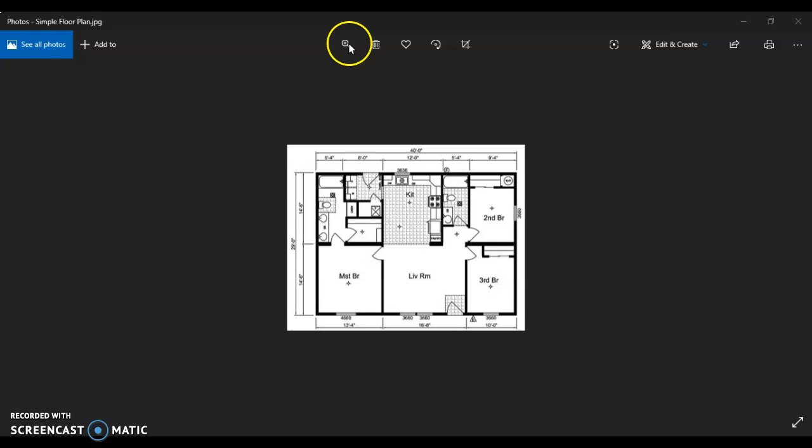We've got most of our walls taken care of, but we need to finish up a couple of these walls. This wall here, we currently just have drawn like this. If I look at SketchUp, right here's the bathroom. We need to cut this little wall out, and we've got to finish this wall.

And this is how we edit walls once we're doing this. And then in here we have a closet. And we have a closet.

Closets are 24 inches deep, inside to inside. That's what a clothes closet is. That's what it takes to hang something. So 24 inches deep, and then we're going to figure this out. This is going to be a 3/0 door, so we have to be at least 3 foot 2 inches away from here.

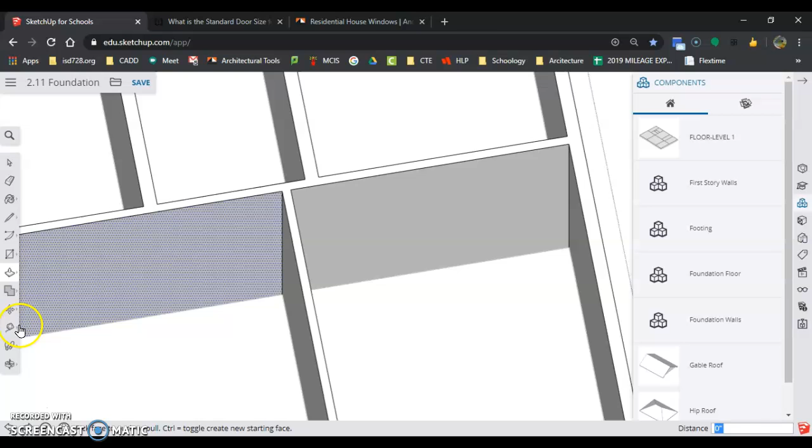So we're going to come here. We're going to take care of this closet first. Guideline, bring it down, 2 foot. Guideline, bring it forward. And then 4 inches, or 3.5 inches, because if I take a look, remember I'm 3.5.

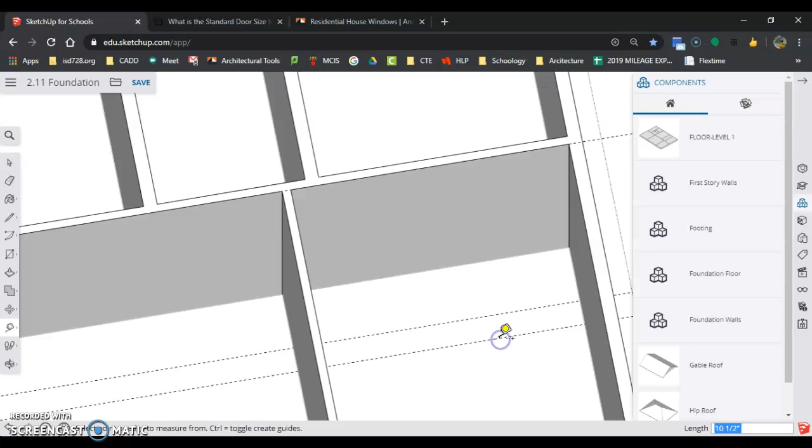Then come in here. I want to be at least 3 foot 2 inches away from here because that door's got to swing open. And then I have to be another 3.5 inches there. So that's this closet wall.

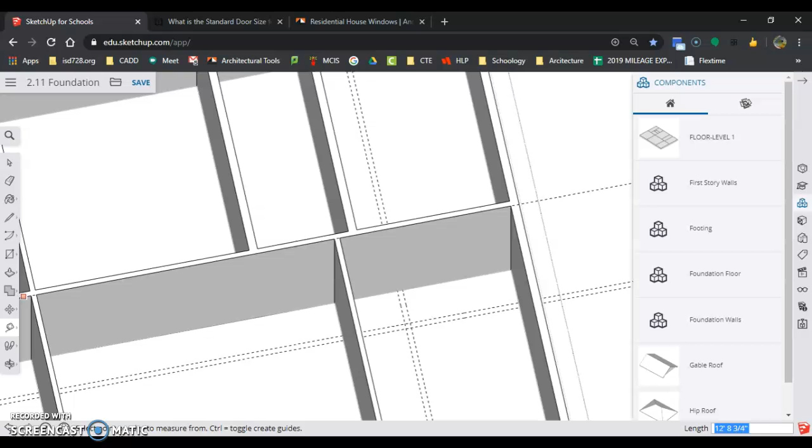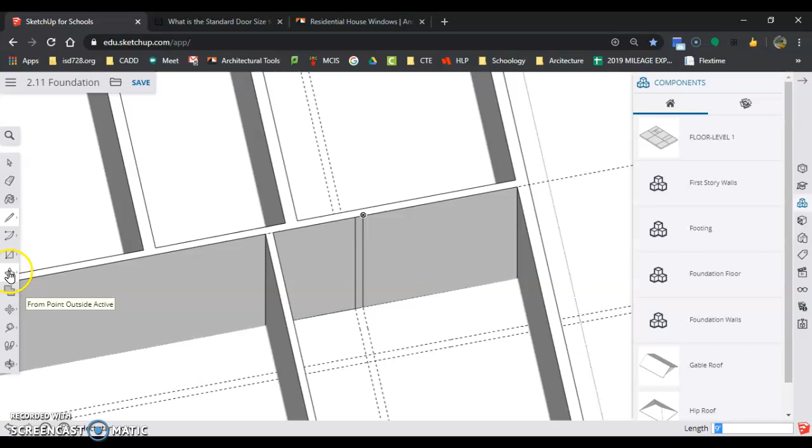And again, I'm inside this model as I'm drawing all of that. Now I can draw a line straight up. Draw this line straight up. And we'll do a push-pull and bring this wall to that guideline.

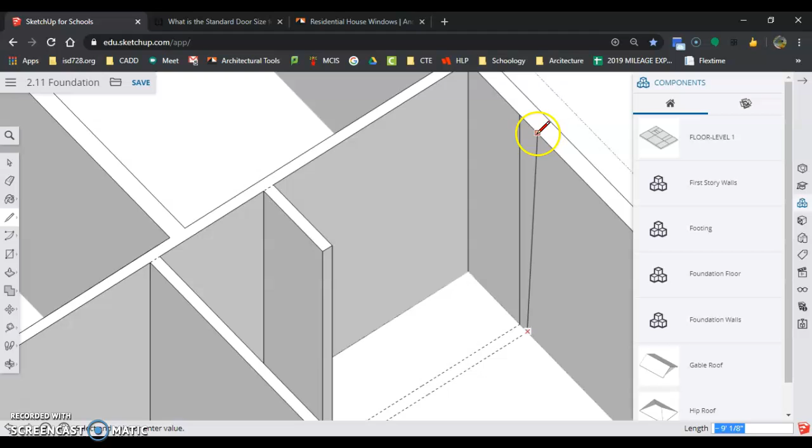Again, draw a line straight up. Draw a line straight up. And do a push-pull to that guideline. I can erase that out. Now I've got that closet in.

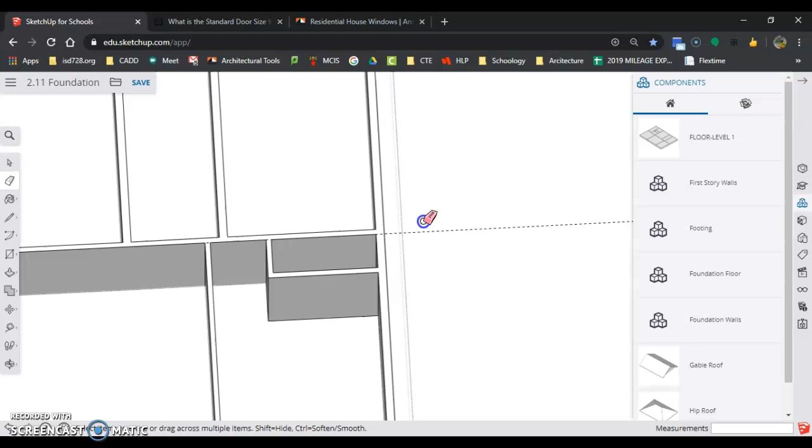Next closet's a little bit easier. So I've got this closet done, and I'm going to this closet over here.

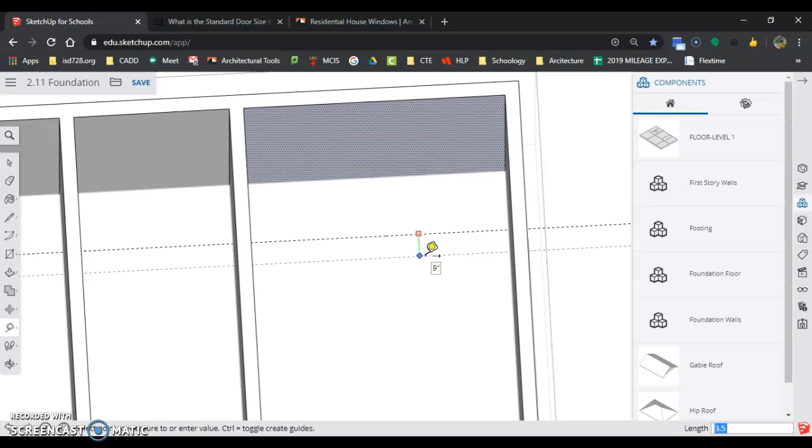Tape measure. Bottom, coming down on the floor 2 feet, coming 3.5 inches. Draw my lines straight up.

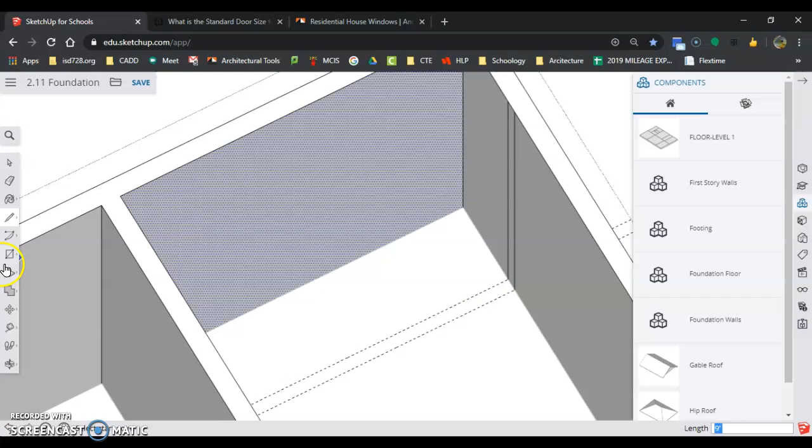Draw this line. Straight up, push-pull it, right across. And I can erase out that edge. Come here, make sure my edge is erased out, and erase that. Now I've got that closet completed and this closet completed.

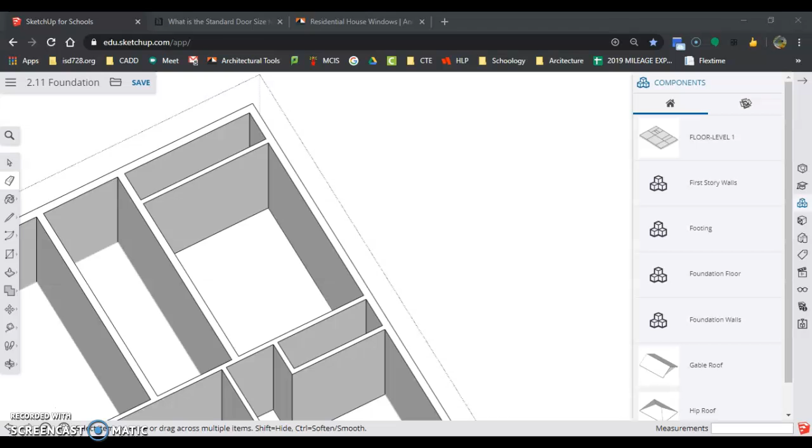Last thing I have to do is work with this piece here. So I'm going to try to put a 3/0 door in here, and we can maybe move this afterwards if we need to. So we need to have 3 inches on each side. So this door going into this bedroom is going to be a 3/0. And actually, let's clean up this wall here first.

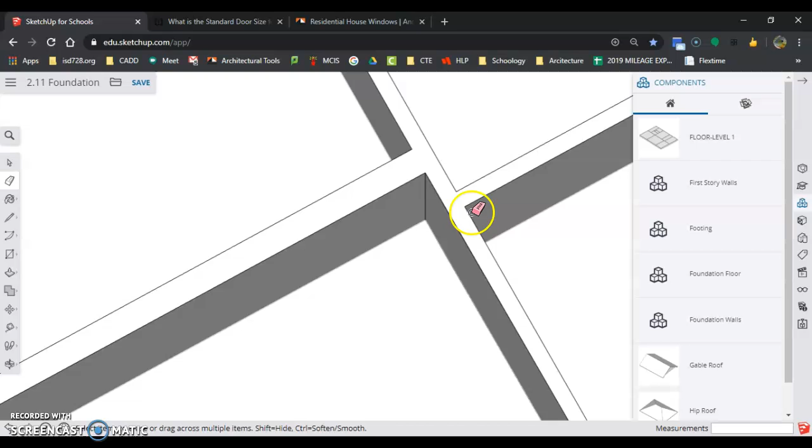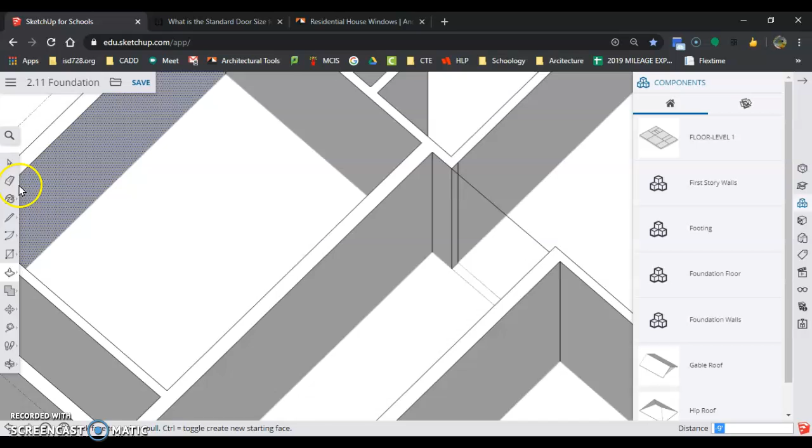So I'm going to knock this wall out by just drawing a line across. Drawing a line across. And now I can push-pull. Drop that down. Erase that extra line. Erase my top line. Make sure I didn't delete a surface. And I have that opening walking through here.

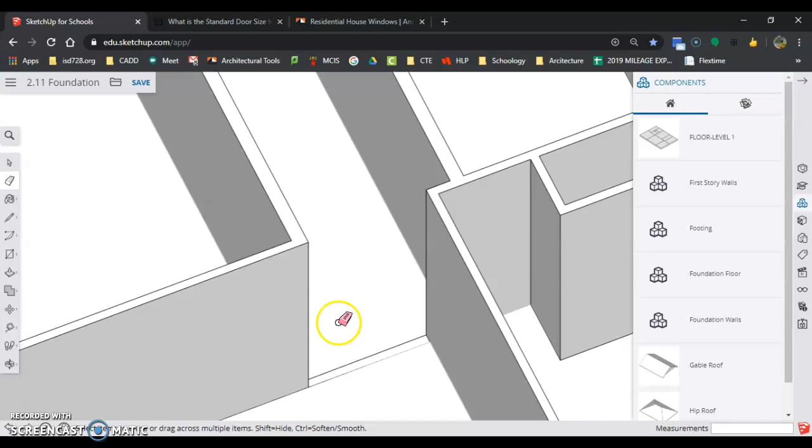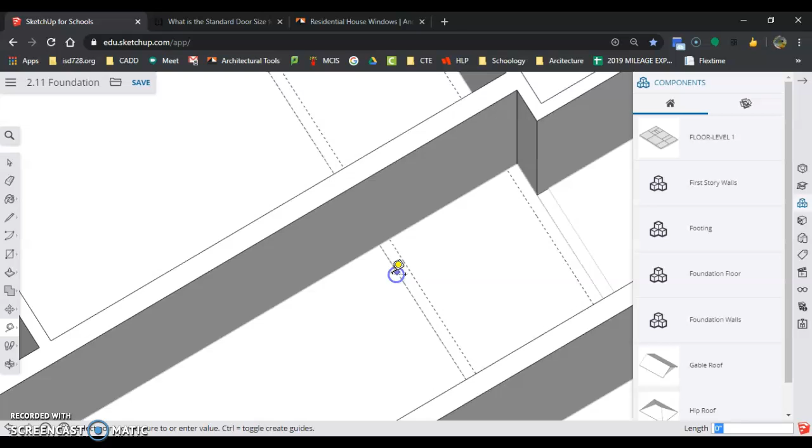Now I've got to figure out this door. So I'm going to put a 3/0 door in here, and this is going to come later in it, but I'm going to put it 3 inches, then we're going to go 3 feet, and we're going to go 3 inches. And that's my door opening. And then I'm going to go 3.5 inches, or from this wall it'd be 3 inches and 3 inches and 3 feet, so 3 feet 6 inches, and then 3.5 inches there.

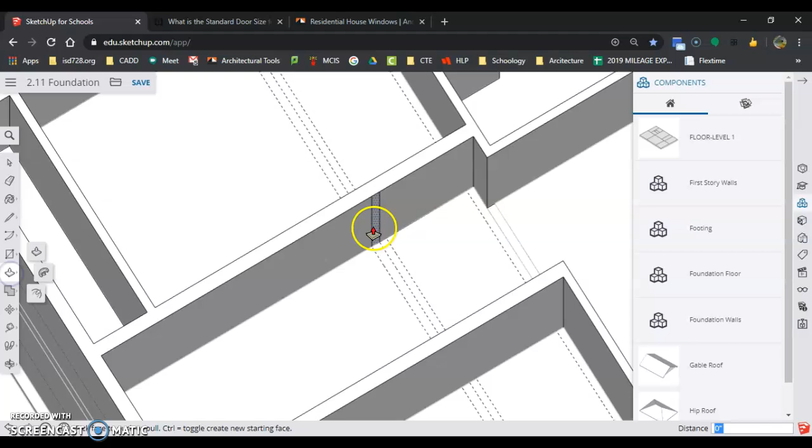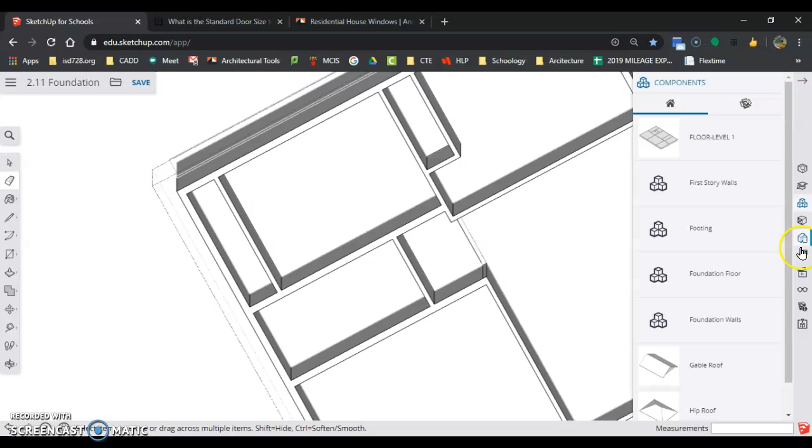Wall line up. Wall line up. Push-pull across. And now we have this little area right here completed. So if I take a look at this straight down, I'm going to change my view a little bit. I can see I have that little alcove taken care of there.

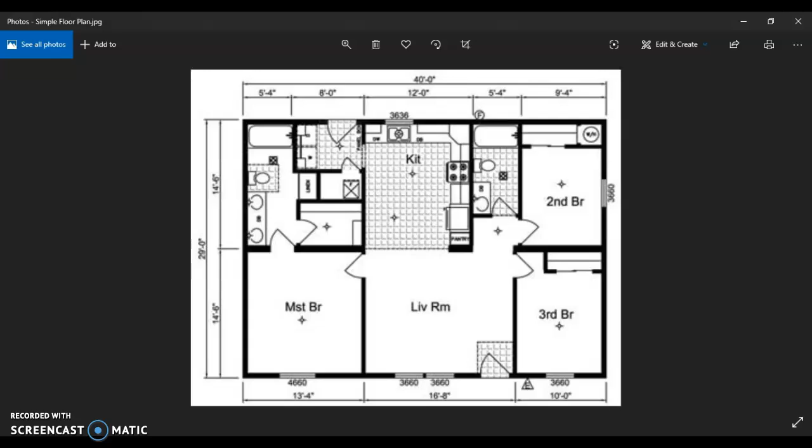And that's how you finish up the last few walls. So if I look there, look here, coming back and forth, I can see all my walls are complete.